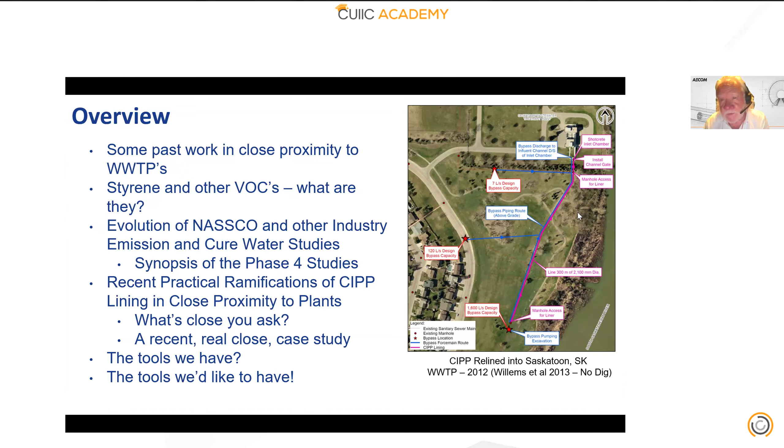A really, really challenging install, just the bypass of it, and not really reported a great deal, but that job was monitored very, very comprehensively to try and understand styrene residual. They're very cognizant of it, and the level of treatment in the plant. The focus was more on the flow through and the impact of it when it left the plant. But it was kind of the first time I saw it documented in a paper.

My first exposure was in another Insituform job in Vancouver at the Iona plant. That picture you see at the bottom is right across the Fraser River from the plant, and they did three shots over 2010 through 2012. My role in those jobs was primarily a traditional role, but it was the first time that I started to see real numbers. They're small there because they're intentionally small, but it was the first time I'd seen hard data that looked at the VOCs and looked at the impact of the treatment process.

These were huge shots across the Fraser, 1700 millimeter diameter tube. You can get a sense of how long those shots are in terms of the whole wet outs. And the outlet was literally right at the interface to the plant. And the cures went on for about 5 to 7 days of the ones that I saw, and it was really eye-opening in terms of looking at the chemistry and a great deal of deep dive.

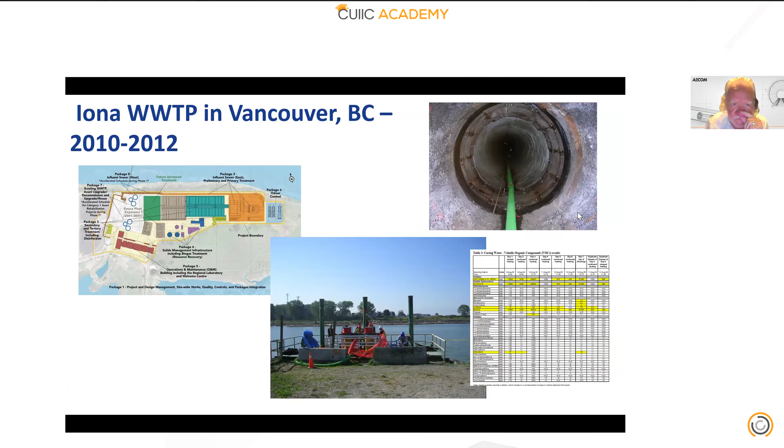Iona at that time was a primary plant, so again, the focus of the monitoring was not on the impact on the process, but on the flow through and what happened when it flowed through a primary process, in terms of its potential impact on fish habitat.

The NASSCO studies really started with a lot of literature that came out in kind of the mid 2016, 2017, and there were a lot of questions about the literature that was there. So the first phase of NASSCO studies was really just to look at the science of it, to see what was out there, and there was a very strong conclusion that there was a lot to learn.

And the phase two studies, which the group was heavily involved with, were looking at worker exposure and indirectly at public exposure in terms of safety. And specifically, one of the things that really brought it to light was as we went into air inversion steam cures, you have a plume and you have it very much out in the worker's face. So to understand that, the 2020 studies were very, very quantified.

I've used the Army Corps of Engineers from the monitoring side. So we finally had someone who knew the importance of doing background. We talk about a VOC like styrene. It's in everything that's out there if you go look for it. So if you don't do background work, you can't do clear work. So we brought in very, very competent people to go and do the monitoring,

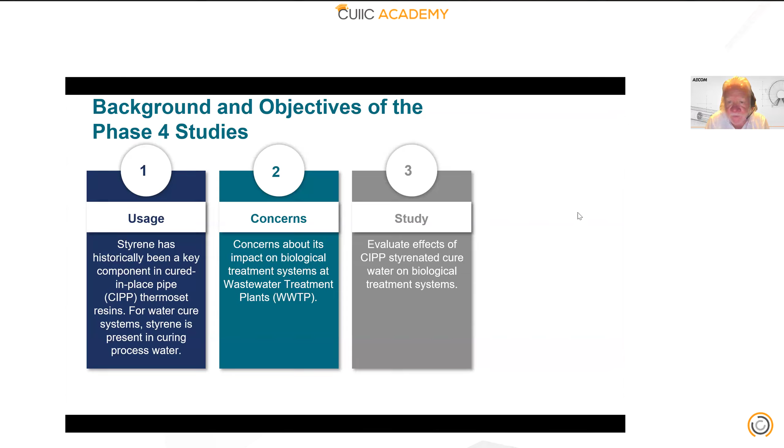In the study portion of it, it was to, one, do hard quantitative work to evaluate the effects of styrenated cure water on biological treatment systems. And I'll talk about that in a minute as to why biological treatment systems were focused on.

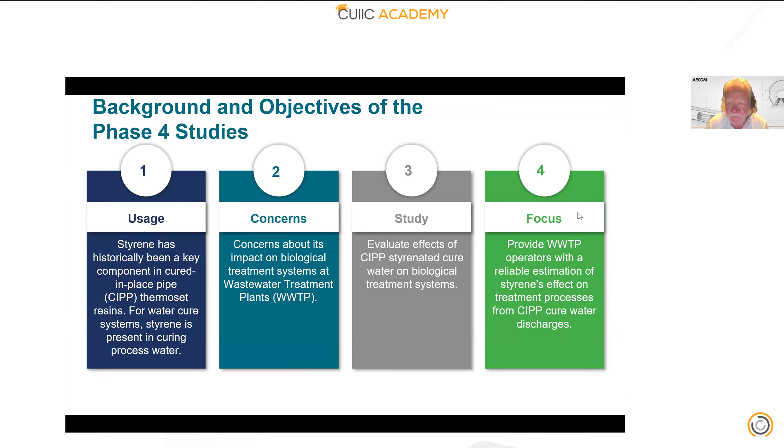And then the real focus was to try and provide wastewater treatment operators with a reliable estimate to quantify at what level styrene could impact treatment processes, and as I mentioned, there are biological treatment processes looking at biomass type processes in the phase 4 study, and that was kind of the focus of the study.

Styrene is... I've worked at different times in my life with VOCs and the whole family of VOCs, and I don't profess it to be my discipline. I'm a pipe guy and liner and understand structure, but VOCs are a really, really unique family of things that we deal with that are out there.

They're easily volatile from water. They will come out of water or solution, so they will be there if you're a worker and you're walking around, and the level of exposure has as much of an impact as the duration. But when you're talking about worker air exposure, you're usually talking in the 20 ppm level.

If you're looking at the styrene that comes out of all of the things, not in nature, but in manufacturing, that use styrene, basically the EPA drinking water stuff starts to go down to 0.1 milligram per liter. So now you're talking less than parts per million. You're looking at the part per billion threshold.

The thing that we'll talk about here, when you get into freshwater biota, the no observed effect concentration, which I'll talk about, can be anywhere from about 0.1 to 4 milligrams. So that work I talked about at Iona earlier, the concern was the flow through and what's the impact on the water course. So I'll talk a little bit about that in context, because at four parts per million, basically you can smell styrene.

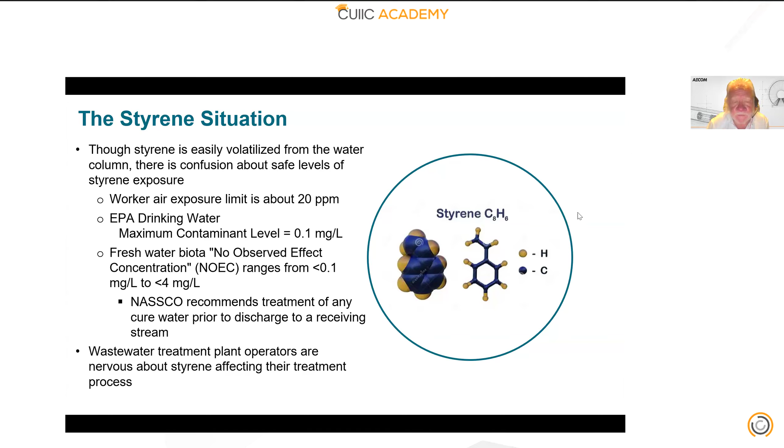The work that was done under this looked at 8 large databases in terms of publications, found 200 that got shortlisted to about 26 that passed the test of both peer review and provided really meaningful information. And basically, when you got down to water quality articles, there were about 6 publications, looking at literally thousands and thousands of publications down to those that were really there.

And from a practical perspective, in terms of that research, they could not find a single peer-reviewed research that actually took what's called a publicly owned treatment plant offline in 5 decades. And that doesn't mean it's not possible, because the testing that I'll talk about shows it's definitely possible. But we couldn't find a peer-reviewed one that provided a meaningful test case study to go and look at.

And the reality is that there's other reasons that a treatment plant can be upset. And styrene, because of what it is, if it's there at elevated levels, VOCs and biological treatment processes are not friends, and that's not surprising. But if it's out there, it is something that you need to know, and that was kind of a big driver for the study.

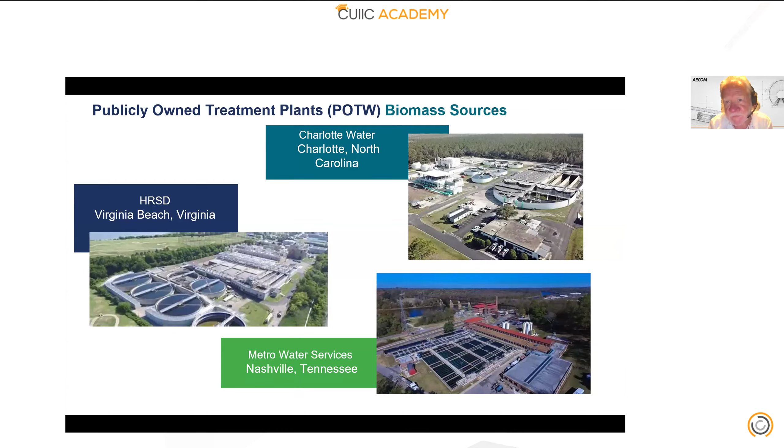I'll talk about in a second. The Charlotte Water, the HRSD, Hampton Roads, and Metro in Nashville. 3 different plants, but all with the same style or characterization of process.

And working on a job that I'm going to talk about in a minute here, I am not a treatment person. So I have a fella that I work with named Keith Sears, and Keith Sears is one of our global leads at treatment. And before we worked on the job that we're working on, he gave me a lesson in the difference between biomass and BOD driven type processes.

If you work up in our part of the world where you have winter, it is certainly more common to have BOD driven processes, just because they need to be resilient. They need to deal with the large temperature swings, the environment. But biomass driven processes, if you look at them on paper, they can handle fluctuations in load, but compact footprints, less handling, basically less energy, more efficient.

But the reality of that is that if you blow up a biomass-driven process, anything that's nitrification, denitrification is much more sensitive to biological curves being thrown at it. So it is much more sensitive to styrene than a BOD driven process.

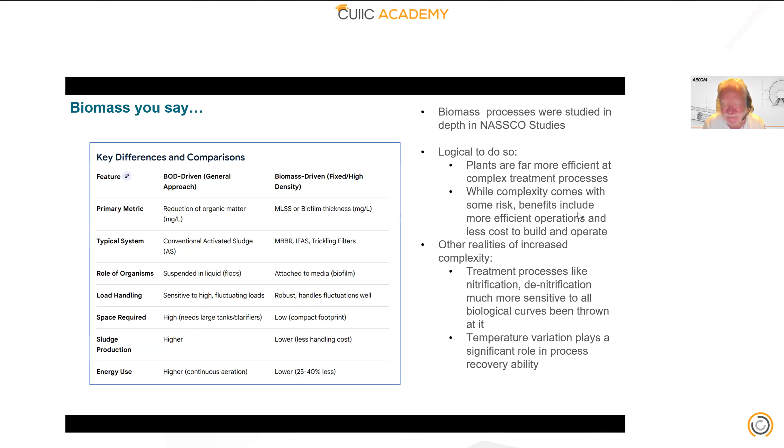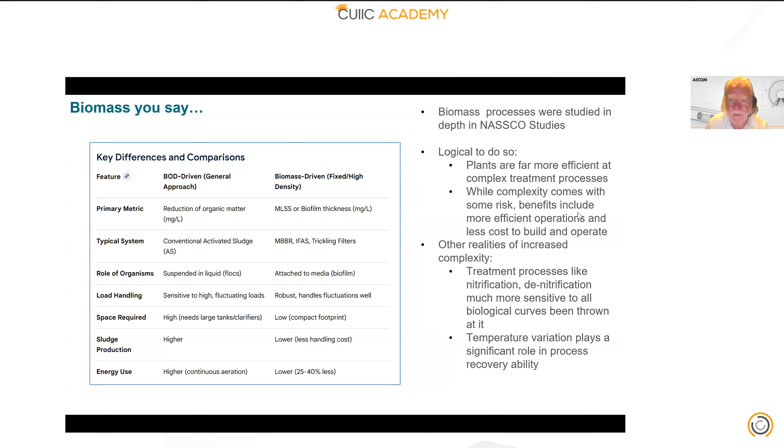And the other thing that certainly was a lesson taught to me by Len Osborne from the early years of working is one of the biggest things that we need to be cognizant of that we sometimes forget is temperature variation. And that's a really, really important thing: temperature variation can play a significant role in both processes in terms of upsetting them and the recovery of the sewage treatment plant.

The key findings out of the biomass studies for those three sites that they looked at was that if you get to the no observed effect and you keep styrene levels to less than about 2.3 milligrams per liter, they did not have a measurable impact on process.

The other thing they found is that these processes were quite resilient, that they could get to the concentration of about 100 milligrams per liter. And basically, if you did destroy 50% of the biota, or the biological in the process, you had a huge disruption on the process, but it recovered.

And then if you take those numbers and look at, what do we know about styrene? We don't do a lot of measurement of it, but a very good cure in a typical hot water cure or a steam cure, if you've got the residual that you're dealing with, is about 50 milligrams per liter. It's not uncommon for them to be in the 50 to 200.

And quite frankly, since we don't measure it, and I've looked at some ugly, ugly cures, I would suggest that inadvertently you can see numbers that are much higher than 200 milligrams if we're not focusing on the cure. But 50 to 200 milligrams per liter are not unusual numbers that we can see, depending on the degree of diligence taken in terms of curing.

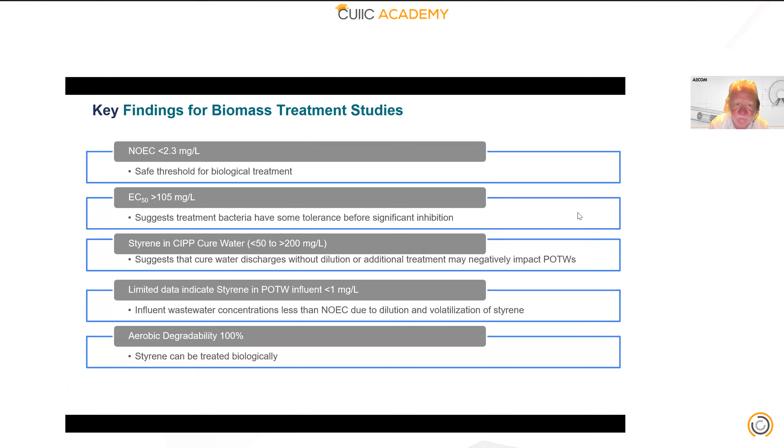So the other thing that we see in typical plants is that styrene is not normal at very high levels. You will see them typically at very, very low levels, less than a milligram per liter, and in essence, as I mentioned, you can actually treat them.

The treatment processes in wastewater have experimented in recent years with things from activated carbon to thermal oxidization, chemical scrubber, biological treatment. By far, the most common one that I have been exposed to and I've seen in industry is activated carbon. Activated carbon is very, very effective. It's very simple to use. So it kind of meets the elegance bar.

And I think if you're a treatment purist, probably the thing that irritates you is that it could be used much more cost effectively than it typically is. So we don't use it very cost effectively, but in the context of what it prevents, it sometimes is a very, very valuable thing, and it is a really useful thing to have in your toolbox.

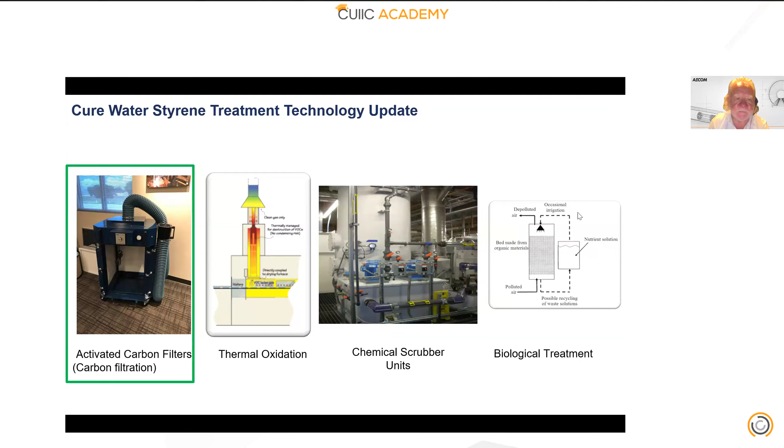And I will touch upon that at the end of this. The case study that George is talking about is a job that came up. We'll talk about it at No Dig North this year, and it was a major upgrade. It was driven for other reasons in the context of the benefits to renewing an interceptor to facilitate very, very complex construction.

But the shot that I know kept George up at night, and anyone else with a conscience, was an over-the-hole wet out and about 400 meters of a 1500 millimeter concrete host pipe, and it was 180,000 pounds of resin in a 37.5 millimeter tube, and it was deep. It was about a 12-meter deep install, actually deeper in some spots.

That plant was a BOD-based plant that treats about 65% of all the wastewater for a city of 850,000. So it's a very, very critical thing. And taking a plant like that offline, you need a lot of lawyers just to defend you from a practical perspective. The reality is that we don't have studies on a BOD-based plant.

And a BOD-based plant, based on the theoretical work that we did, we thought that it could take literally about 25 milligrams per liter or something higher, but we had nothing to base it on. So the objective and the manner of doing these and the risk that you're managing is something that you genuinely have to give some thought to in terms of how safe do you be.

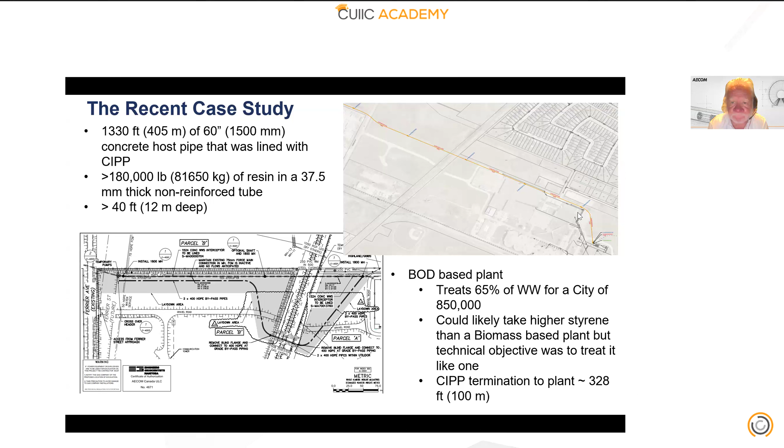And like most plants, you've got basically multiple inlets. This has a triple inlet. We were dealing with one of the three interceptors that came into the headworks of the plant. The contractor, and I don't have to hide who the contractor was in this case, they knew through diligence, and if someone has done monitoring on it, they have done probably more monitoring than anyone.

And I would encourage as part of the protocol that we do to take a closer look at residuals. There's a lot of benefits to understanding that if you're getting 50 milligrams per liter in the cure water, you've done a very, very good job. You've likely achieved a degree of cure of somewhere between 97.5% to a full cure in the liner. And that's consistent with the ones we've seen, whether it's 50 to 200 or 250; that means that someone's done the work at doing rigorous cure.

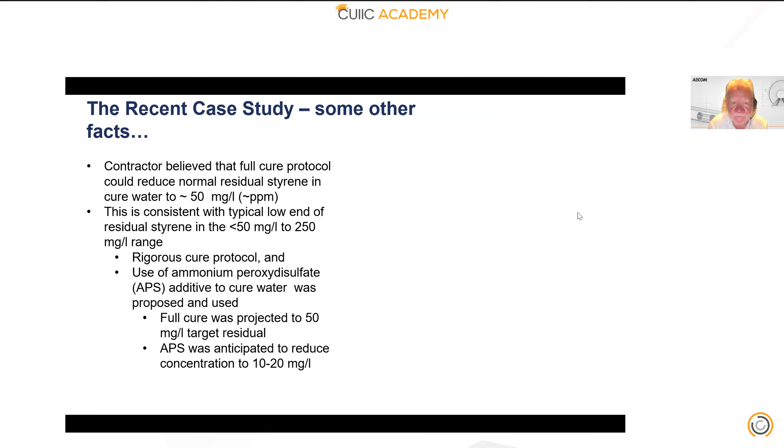In the context of this specific job, the contractor had proposed using ammonium. I can barely pronounce it, so I call it APS. They use an additive, and their objective with that additive in the cure water was to take that 50 milligrams per liter and turn it into 10 to 20. That was kind of a part of the process.

The reality of this is it's all a good plan, but how do you measure this? Like, what do you use? How do you structure a contract around it? And this was something that was done on an emergency basis. This was a lot of work done safely with risk management, but under pressure because there was a lot of money involved in the work that was done that had nothing to do with styrene.

The primary measuring devices that we have in industry are PIDs, direct read devices, passive dosimetry. That doesn't help you to see the fluid. That's for styrene in air. And we're currently in the phase 5 studies realizing what a gap it is in industry to not be able to. I can stick a thermometer and measure the temperature of water, but I can't stick a device in the water, in the waste stream, to measure styrene correctly.

And there are devices out there, they just haven't been piloted or brought to market. And that is a big part of the phase 5 studies, to try and provide ways to do this. And I'll talk about what a challenge that is from a practical perspective on this case study we're talking about.

The other curve that this case study had: we were focusing so much on styrene, we really never thought about temperature. And it was quite a casual conversation with the process engineer, letting him know that our discharge was 100-degree Fahrenheit water, and that caused tremors in them. Especially in the wintertime, a typical winter waste stream in this application is kind of 8 to 10 degrees centigrade. I'm working with something that's 30 degrees centigrade in terms of the fluid coming out.

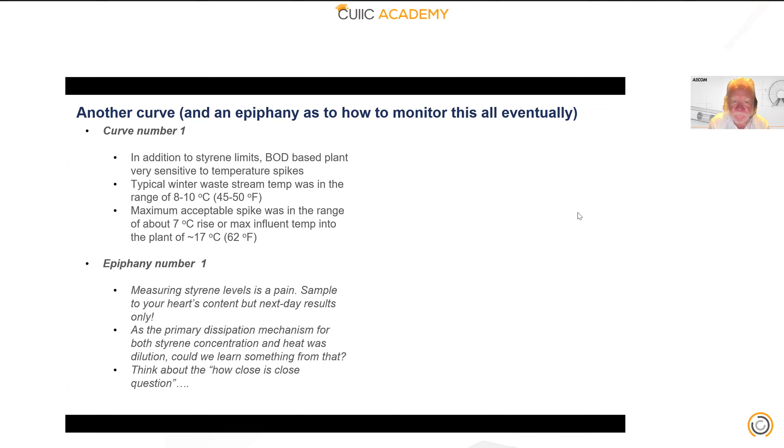And one of the things that became an epiphany is that if you looked at how styrene dissipates and heat dissipates, the majority of that process is dilution. In the context of styrene, there's what we call a half-life effect because it actually just goes away. It dissipates very, very quickly. We found that in steam cures. In heat dissipation, you have dilution and the heat loss effect. So these two things are there.

Dilution is really easy to estimate. Quite frankly, the half-life effect is one of the things that we're trying to do in the phase 5 studies, to get a better understanding of how close is close in the context of the residual styrene. But the dilution is there. And similarly with heat loss, the heat loss effect is quite pronounced in the wintertime, not as pronounced in warmer climates, but it's kind of how the temperature dissipates.

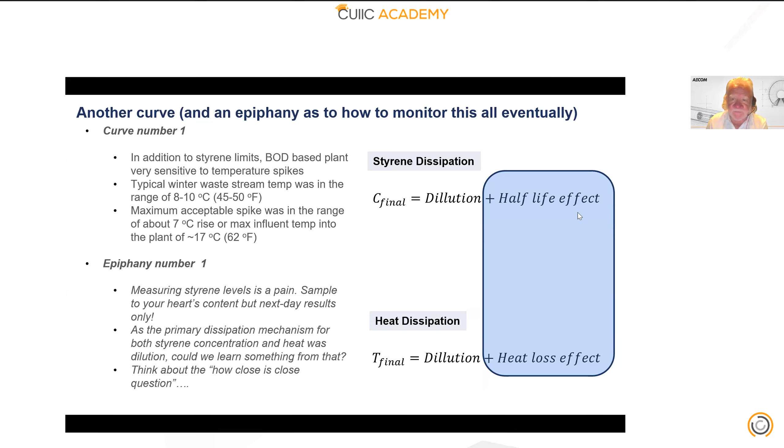The epiphany to this is that they're the same formula on the dilution side. And that was a real eye opener, because when you look at dilution, if you can mitigate and solve your problem with dilution, it's very conservative because you have a half-life that's going to make it less. And the heat loss will always make it less. So you'll be over predicting if you just manage your problem with dilution. In essence, it's a safety factor because there's actually more loss or more dissipation.

So the dilution effects, like I said, tell us very similar stories. They're the identical equations. You're looking at the volume you're dealing with and the concentration, mixing it with some raw stuff that's not contaminated in the context of a traditional job. And the temperature side, same type of thing. It's the exact same formula.

The flow rates are really the same because at the site that we work at that has cure water, we typically have a bypass if we're working near a plant, because these are larger pipes. And if we know the flow rate of the bypass and the release rate that we're pumping out, you basically can calculate dilution. As I said, the styrene fluids go to a lab; the temperature you can measure in real time.

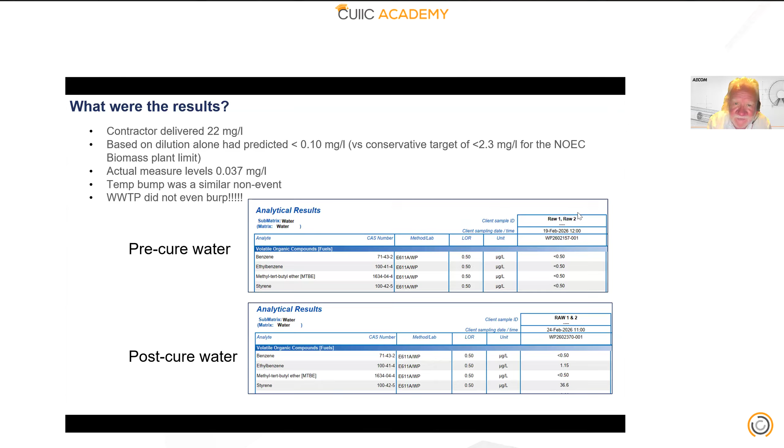A word of caution, and this is when you go and get VOCs back from a lab. This is a sheet that I got on this job, and you'll see that number of 36.6. I just about had a heart attack, because I thought it was 36.6 milligrams per liter, and they report VOCs in micrograms, so one level down from part per million. So that was 36.6 micrograms, not milligrams per liter, and that's 0.037.

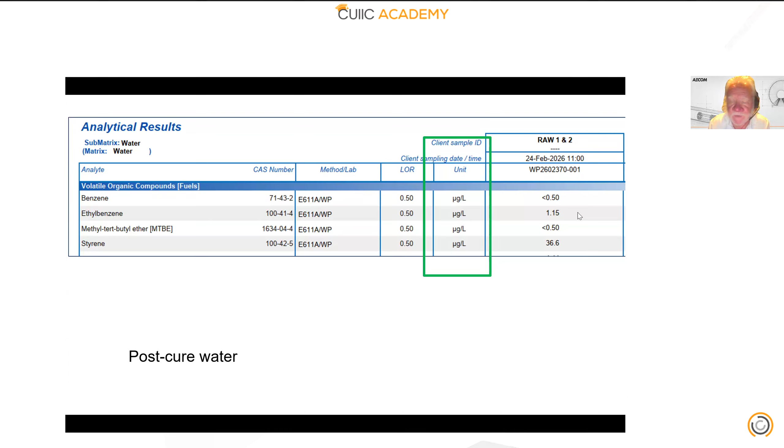So after not having a heart attack, I felt better and got some more accurate flow data on it. Again, the dilution will give you a target number if you work to your dilution number, and you do a lot of digging on the rest of the process, the half-life process, and similarly on the heat loss side. You can do some work to get a better appreciation of it, but keep that in your pocket as a safety factor from a practical perspective.

So in that context, we've come a long way since styrene was just something that smelt and stunk. It smells like glue. And we definitely know how to define its risk to workers and the public, and the last 10 to 20 years have taught us an awful lot about how to do that safely. There is no question, it's not a flippant thing. If you take a sewage treatment plant off, you have a major impact on the environment.

And these two questions of how close is close and how do you mitigate them are really important issues, because a lot of interceptors don't get rehabbed. Even the interceptors in the case study shown here, if they were anywhere else in the system, would probably have been rehabilitated sooner, but weren't because of how complex it was, or how complex it was perceived to be. So those are the most critical pipes you have, without question.

So to be able to line those in a cost-effective manner at a fraction of the cost of replacing them, buying a new life and making them more resilient structures, which are all lessons we learned. But a big part of that is understanding a plant across disciplines. Someone with my background and someone with a process background rarely talk. So you have a lot of tools in the toolbox, and this communication outside of your discipline is a really important aspect of this type of work.

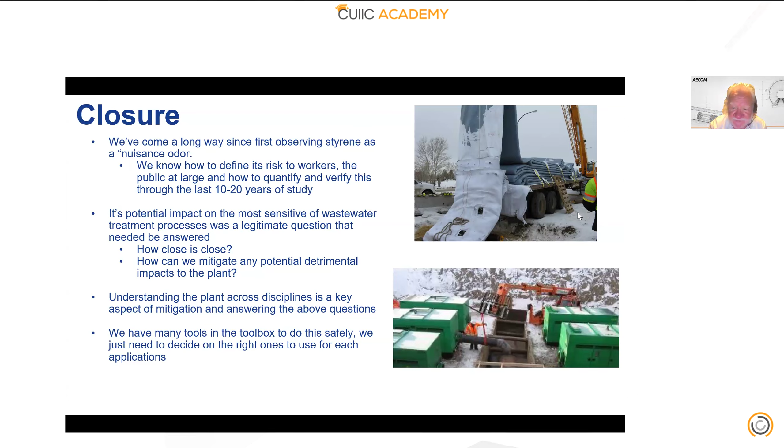So many tools in the toolbox. We just need to determine what are the right ones for the applications, and that is kind of the core lesson learned in this type of work, and in the case study I'm talking about: you need wastewater treatment on your lining team. You need that type of expertise. You need to actually talk the language of the plant.

Every plant is different. They have different systems, different time cycles, different ways that are convenient. There's maybe BOD-driven plants and biomass-driven plants, but as I have humbly discovered in the last year, every plant is subtly different, and there's enough reasons for the plants to burp, and if they burp and you're working with a VOC around them, you're the logical person who caused it to burp.

So you need to understand how to do that. The monitoring includes not only temperature and styrene, but from a practical perspective on this case study, I would love to tell you that I had thought out a wonderful protocol to do it. The flow monitoring was there because the contractor was diligent and very focused on it. It needs to be structured contractually into how you monitor it and how you do it. So knowing temperature and styrene without flow is an equation with more than one unknown.